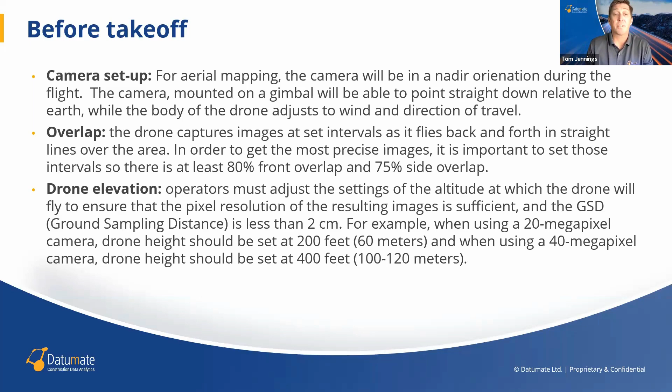The next really important consideration for photogrammetry is ground control points. Ground control points are a critical component and can be thought of as a ground truth that are used to manipulate the 3D model during the photogrammetric process. GCPs will be marked and measured by someone trained to use survey equipment. It's a very easy process, but can be confusing. Here's a couple of pro tips.

Mark the GCPs in an area that will not be damaged during construction so that they can be reused in subsequent flights. Distribute the control points evenly spaced across the job site so they can be clearly identified from the air.

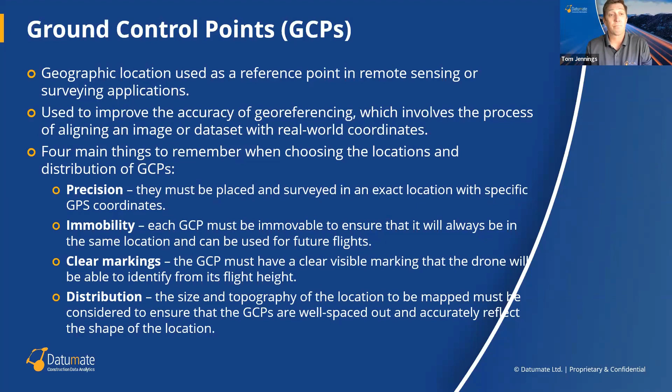RTK versus PPK. So let's start by understanding the basics of RTK and PPK. RTK stands for real-time kinematics and is a technique that provides real-time positioning corrections to the drone during the flight. It requires a connection to a base station or network that provides GNSS corrections. On the other hand, PPK, or post-processed kinematics, is a technique that processes the GNSS data after the flight. It also requires a connection to a base station, but the corrections are applied post-processing, which can offer some advantages in terms of data consistency and reliability.

The surveyors on the site will be utilizing the same RTK stream to correct for rovers in the field. We recommend using the same network so all of your equipment on site is working together.

So a continuously operating reference system, or station, or CORS, is a network of GNSS base stations that provide high precision GNSS corrections. In the United States, several CORS networks are available, including the National Geodetic Survey's CORS network and various state-operated networks. Some of these networks offer free access to RTK corrections, while others require a subscription. One popular subscription-based network is SmartNet, which provides high-quality GNSS corrections over NTRIP.

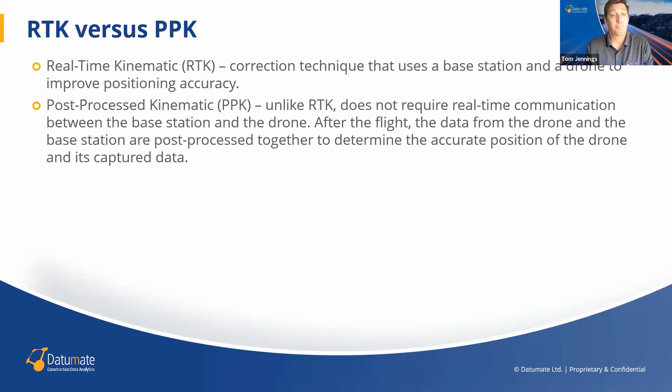All right, thank you, Tom. So we captured the data now, and now what do we do with it? Well, the drone data does not work alone. The value of the DatuBIM platform is that your data will not be siloed on a single desktop. Everyone in your enterprise will be able to log into our cloud-based solution to make measurements, analytics, and identify deviation from design files.

Once we have the raw drone data processed in the cloud, engineers need a software package that can handle large files, but is easy to use. The data is a really important part of the drone program. Tom will now talk about some use cases of how the data can be leveraged to successfully monitor and track infrastructure projects.

Back to you, Tom. Thanks, Koby. Yeah, so ATS is a general contractor that is based in Kentucky and has been working with DatuBIM since 2020. Their drone program is comprised of a surveyor who is also the drone pilot, and then a project manager. The surveyor will capture the raw data and process it in DatuBIM. Next, the project manager will analyze and distribute the data internally. This is a perfect example of that capture, collaborate, and consume method.

So next, let's look at a specific example of how ATS has used drone data in mapping to save thousands of dollars in a single event using DatuBIM.

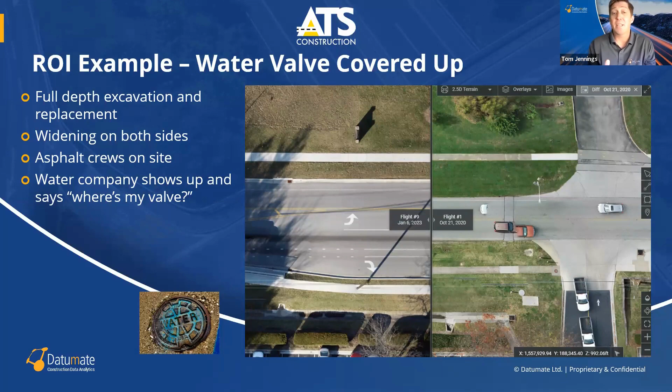In this road expansion project that included several subcontractors and many construction teams, ATS accidentally covered a water valve in the road. So in this picture, you can see the area where the water valve was located on the surface of a paving project, but was inadvertently covered.

These types of errors and rework can really be negatively effective on the bottom line of your construction project.

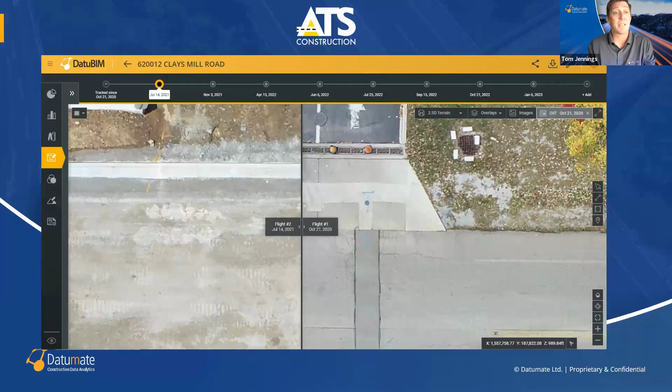Let's go to the next slide, Koby.

So the conventional way to solve this problem would be to call the water company and have a locator provide an area to excavate. Now, keep in mind, the locator is not going to have very accurate information to work with, and he's going to uncover a large area. Next step is the repair will bring in workers. They're going to hand dig to locate the valve, create a cover, and finally the asphalt crews are going to come in and fix the pavement.

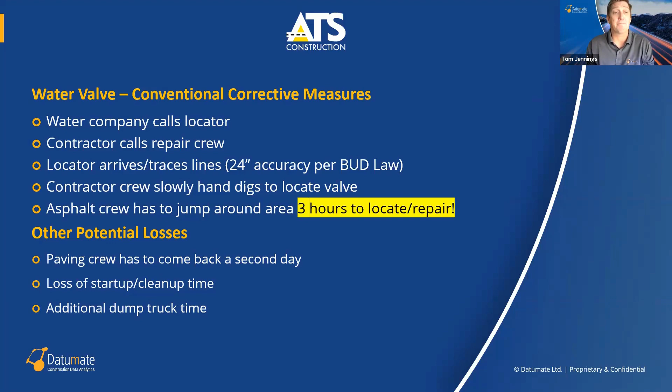So let's take a look at how much this could all cost us. First, we're going to have the repair crew come in at $400 an hour, working for up to 6 hours. You got to get the project manager involved, he's going to spend up to 5 hours. And finally, your paving crew at $1,600 an hour is going to come in, and expenses here could be well over $7,500.

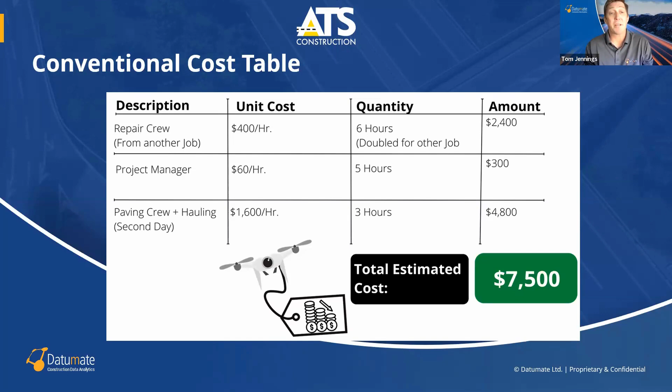This gives us a clear picture of why rework is so expensive.

So let's take a look at how we can fix this with Datumate. The foreman on the project notifies the project manager, who is able to log into Datumate from the office, or we could even have the foreman log in directly from the field using a tablet.

They're going to be able to identify that water valve from a previous flight and pull up exact coordinates on its location. Next, the PM is going to notify the team of the precise coordinates of the water valve so that the crew is able to dig in a very exact spot.

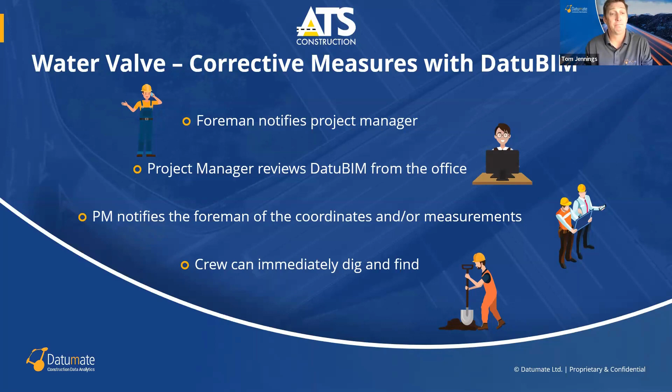Using Datumate, we're able to eliminate the call to the water company, and the project manager is able to identify the coordinates of the water valve in minutes. By reducing the time spent on rework, Datumate is able to save ATS a significant amount of money and improve their bottom line.

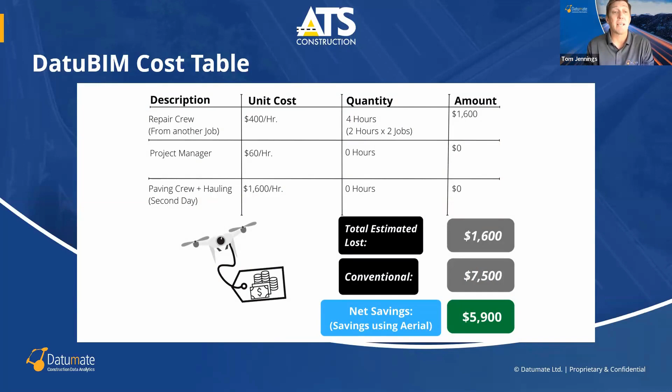Turner Land Survey is a professional land surveyor specializing in stream environmental restoration. David Turner is the chief surveyor for the company and also the primary pilot. At Turner Land Survey, the pilot also completes all of the processing and analytics. We wanted to share comments from David Turner, Vice President of Operations.

David, is it fair to say that Datumate has become an essential tool for land surveyors, enhancing the efficiency and accuracy of your work? In my opinion, yes. What it's done for us has allowed us to collect data much more efficiently and over a larger area, which up until using photogrammetry and LiDAR technology was a little bit daunting due to the ease of processing with Datumate.

Some sites that we would do might be so large or cover such an area that it's not cost effective to the client to actually collect the data they really need. They don't really know what they need until we actually get in there and start telling them. But once they realize what they got, sometimes it's, well, that's going to be too much for my budget. So this allows us to give them something that's actually very cost effective.

We recently had a site where the contractor was being paid by volume on what they had to move for a brownfield cleanup. The only way to actually do that effectively was to fly the site, because having to collect data points each time and give something comparable on 4 different site visits was not going to be cost effective for them.

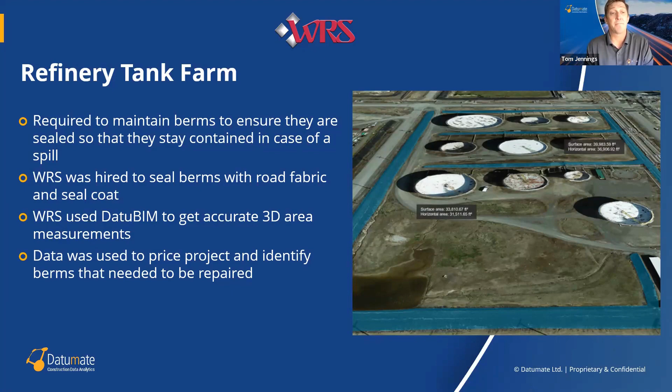Datumate has been a real game changer for the company. It's allowed them to provide accurate measurements, keep their teams safe, and streamline processes. They've been able to effectively manage their projects, better communicate with owners, and expand their services to new industry. Datumate has truly transformed the way they are able to work.

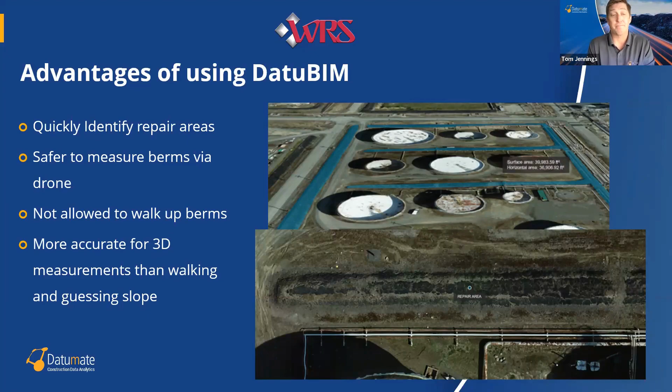Aaron Dort worked at a large company in Oregon with an established drone program using the Datumate platform. Aaron was brought over to All-Ways to help set up the drone program and chose to continue working with Datumate. At All-Ways, Aaron is the grade control manager and also serves as the pilot and data analyst. All-Ways Excavating is using Datumate to perform mass haul analysis on site to avoid costly hauling fees.

I am going to read directly from our client, Aaron Dort. 'We had already started work on this project before we introduced the platform,' said Dort. 'There's a specific area of the site where the biggest fill for the project was needed. We wanted to track the progress of that fill because we had to make a decision about whether we could complete the site work with material we had on site or needed to bring in extra material for this.'

'The first time I went out to check progress on the site, I had to do a topo on foot, and it took me about half a day to do that—just that one small part of the site. After that, we started using the drone and the Datumate platform. All I needed was 20 minutes to fly it, and I didn't just get the information about that small part of the site—I got the information for the entire site.'

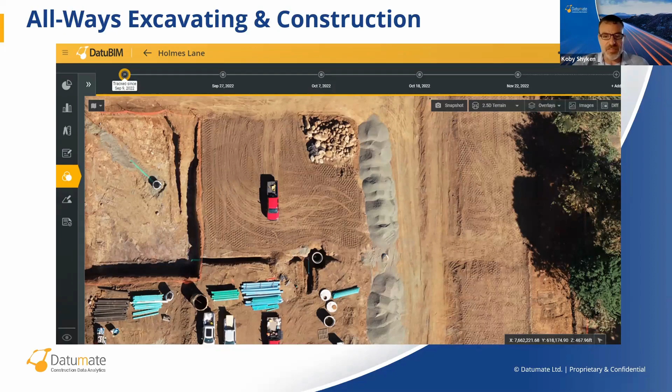Aaron found the Datumate platform was a huge time saver, and he was able to collaborate effortlessly with his teams in the field.

Fantastic, so I think we're ready for Q&A. Those are really interesting use cases. It's always amazing to hear from customers and understand how they're using our platform for really unique and interesting use cases. It's always an eye-opener for us as well.